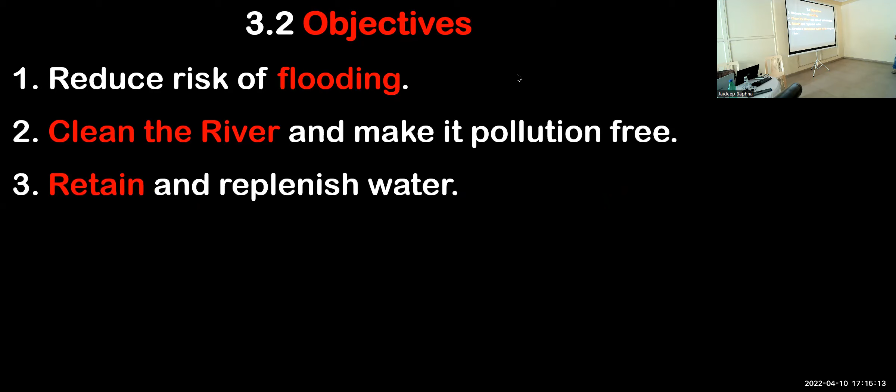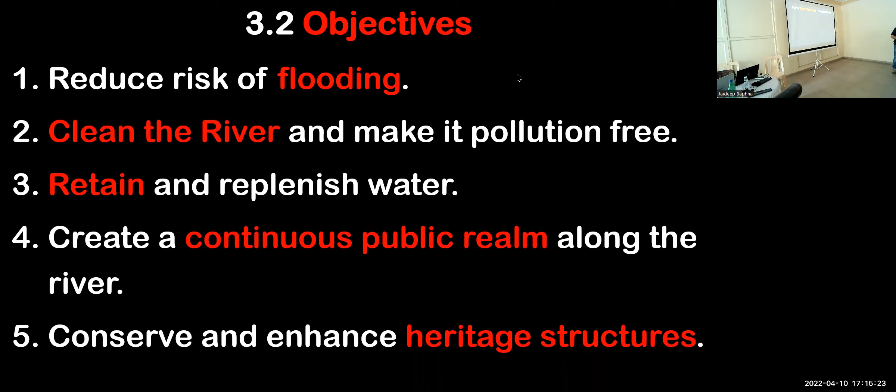Reduce risk of flooding, clean the river and make it pollution free, retain and replenish water, create continuous public realm along the river, conserve and enhance heritage structures. These are the basic aims mentioned in the DPR, in the same sequence, without any change.

Now let us see the present status of the rivers as far as pollution is concerned, because we all know the rivers are really stinking - a horrible thing. These are the most polluted rivers in the country right now.

Current water supply to the city from irrigation department, from various dams, is 1,350 MLD, that is million liters per day. Groundwater extraction, as per our estimates, is 310 ML daily. So total water consumption is 1,660 ML.

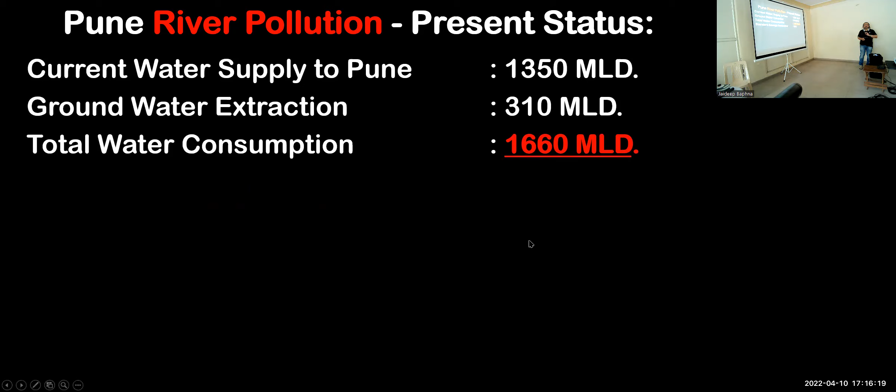As per CPCB norms, 80% of the consumption gets converted into sewage. So our daily sewage generation is 1,328 ML. Present sewage treatment capacity of all STPs of the corporation is 507 ML.

There is a new project financed by JICA. In that project, they are coming up with some 10-11 new STPs having total capacity of 396 ML. So in the next 5 years or so, our treatment capacity will be 507 plus 396, that is 903 ML.

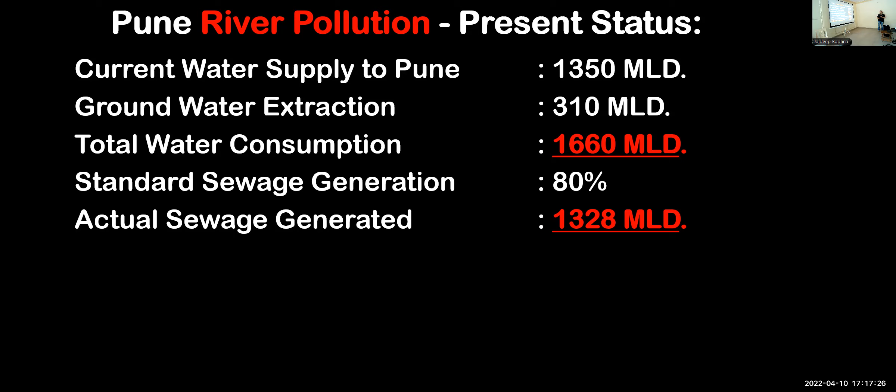Whereas as of now, we are generating 1,328 ML. So the minimum deficit, even after completion of JICA and this riverfront development project, is going to be 425 million liters of raw sewage entering into the rivers daily.

So whatever this project is, let us not go into the details. But whatever water will be there, it will not be water, it will be raw sewage. Can you imagine the impacts of this sewage on the downstream side people, particularly those living downstream on Ujani Dam?

There is only one species of fish surviving, that is chilapi. That's not a native fish, but it's the only one that can survive on very low dissolved oxygen levels. The fishermen are having extremely acute skin disorders. The water is not even usable for agricultural purposes.

The cattle are having multiple physical disorders, even human beings. That area is now known as the kidney stone belt. They are having multiple digestive system disorders, and the percentage of impotency is also increasing - not only in human beings, but in cattle also.

And we are responsible - we the people of Pune - because we are discharging raw sewage and industrial effluent without proper treatment into this system.

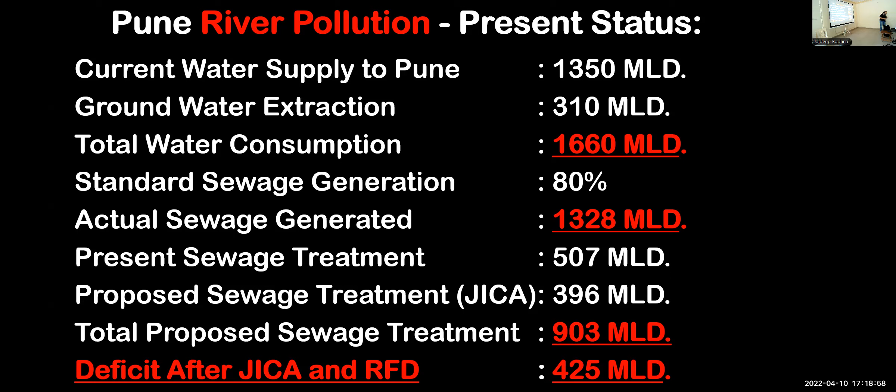So now, what are going to be the impacts of riverfront development? Let us go through them quickly. In spite of this project, as I have told you, the rivers are going to remain highly polluted. It is going to cause massive disruption in the traffic of the city, and of course it will lead to a rise in air pollution. Impacts of climate change are not considered anywhere in this project.

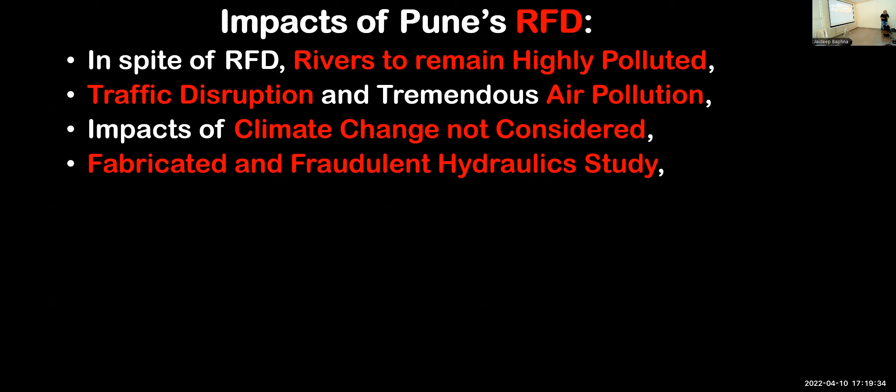Fabricated and completely fraudulent hydraulic study. Steep rise in flood levels within the city. Flawed environmental clearance has been accorded to this project by the central government. Depletion of groundwater table. Irreversible destruction of biodiversity - Gurudas will talk particularly about groundwater and biodiversity.

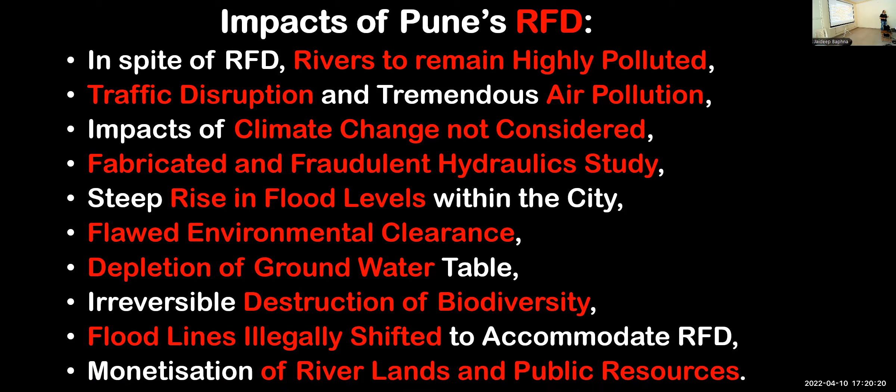Floodlines have been illegally shifted to accommodate this project. The river lands inside floodlines are going to be monetized, and public lands along the river are going to be monetized to support this project financially. So let us go to the first part, city traffic disruption.

Now it's a different issue whether a road should be there in the river or not - let us not go into that. But as of now, that road exists, and in the evening, thousands of people return by the same road.

Now, in this project, it is never communicated by PMC in their so-called public consultation meetings that this road and the bridge is going to be demolished.

Not only that, totally 4 bridges are going to be dismantled for this project. 2 bridges on Mula River and...

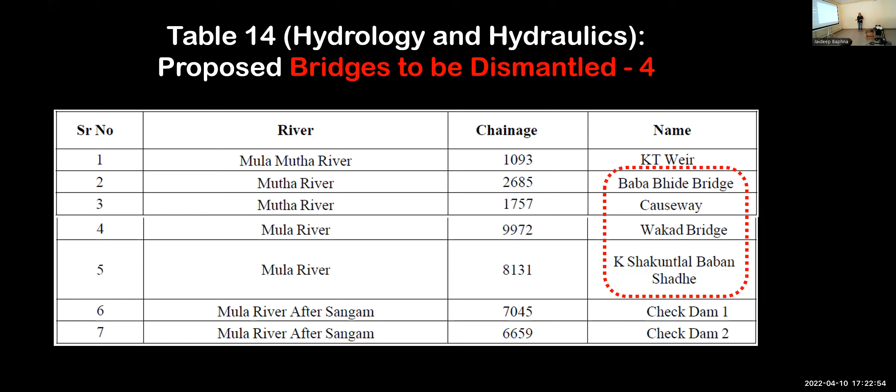7 bridges are to be elevated where they are. It is not mentioned anywhere in the DPR how they are going to raise the bridges, whether it is possible, which technology will be used, and how the traffic will be disturbed while elevating the bridges.

See, these are not small bridges. I mean, really very heavy traffic is there on all these bridges. Let us take only one example, Tilak Bridge.

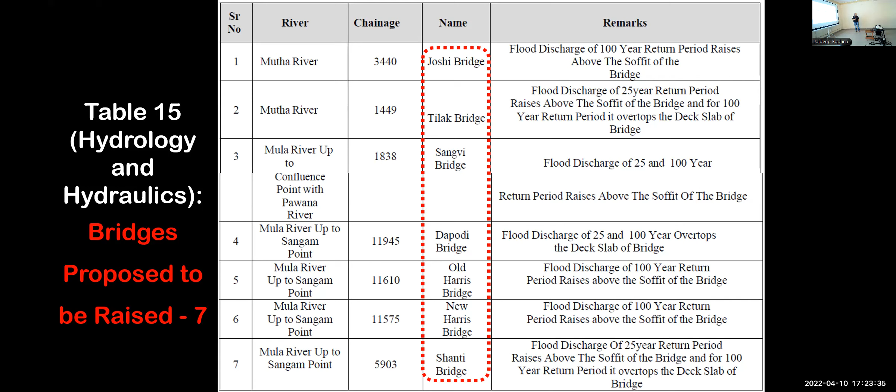Now see, this is from their DPR. All these tables are from their DPR. The bottom of the bridge, Tilak Bridge - this is Tilak Bridge - the bottom of that bridge is 545.98 meters. All these levels are given above mean sea level. So, 545.98, say 546 meters. That is the level of the bottom of the bridge. And...

They have given water surface elevation, level of the water of 100 years flood. That is given as 547.93, say 548 meters approximately. So the difference between these two, 546 and 548, is 2 meters. So if you don't want this bridge to cause any impediment to the natural flow of water, you have to raise it by minimum 2 meters - 548 minus 546. Otherwise, it will not serve any purpose.

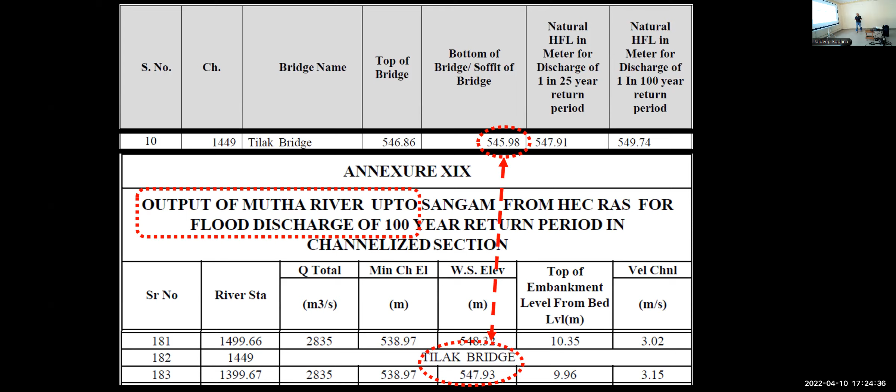Now, if you elevate this bridge by 2 meters, how will the vehicles approach or exit from this bridge? That bridge will be 2 meters above the road. Then are they going to provide steps for the vehicles? It's very simple, nothing very complicated, but they are planning to do it. Anyway, let us go ahead.

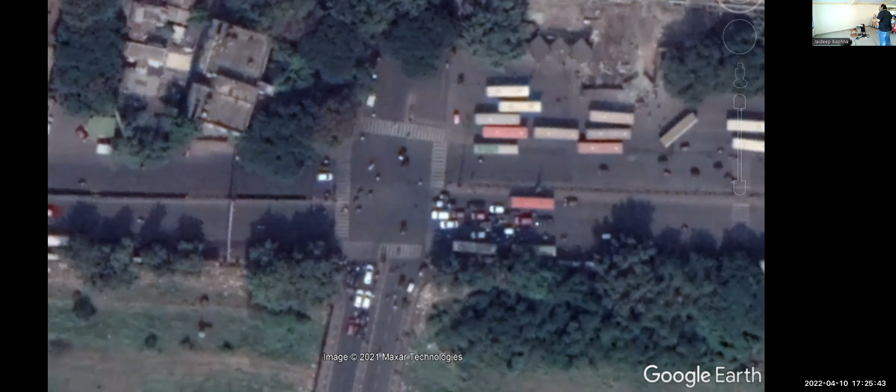In that report, they have divided the state into 6 divisions. Maharashtra is a pretty huge state, so they have divided the state in 6 divisions. Let us say only what they have stated about Pune. In Pune, they have stated that projected increase in monsoon rainfall is up to 37.5%. So annual rainfall is going to increase by 37.5%.

In fact, this is far more accelerated actually than what they have predicted. And not only this, but they also have stated in their report that on one side, annual rainfall will rise, but rainy days are going to be less. It means there will be much more frequent occurrences of cloudbursts, which we are experiencing - there is no need to prove it. This is not considered anywhere in this. They have not even mentioned the TERI report in this point.

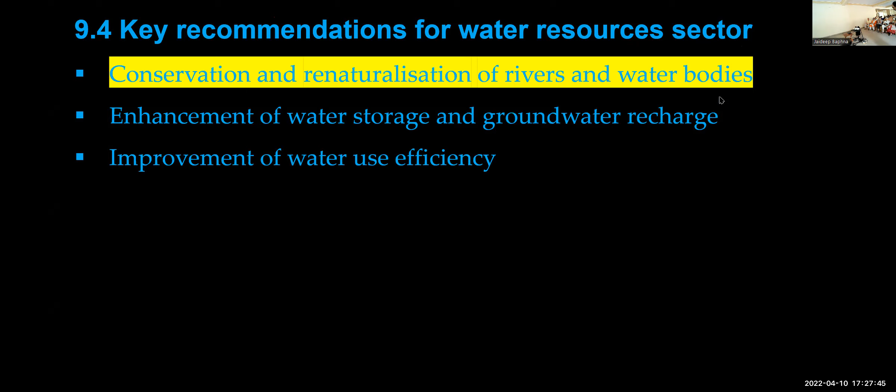In this report, they have also stated key recommendations for the water resources sector: conservation and renaturalization of rivers and water bodies. These are the directions given by TERI - retain and conserve the riparian zones, renaturalize existing wetlands, enhance native vegetation, and formulate stringent policies to prevent the dumping of debris and waste on floodplains and wetlands.

But this project is exactly opposite of this. They are dumping massive, unimaginable volumes of debris right on the river, constructing embankments and channelizing the river, reducing its width. Let us see the other side.

There are three important parts of this detailed project report. Actually the DPR is a few thousand pages, but these are the key sections: the main report, and then two hydraulic parts. In these 791 pages, the words 'climate change' are not even mentioned once.

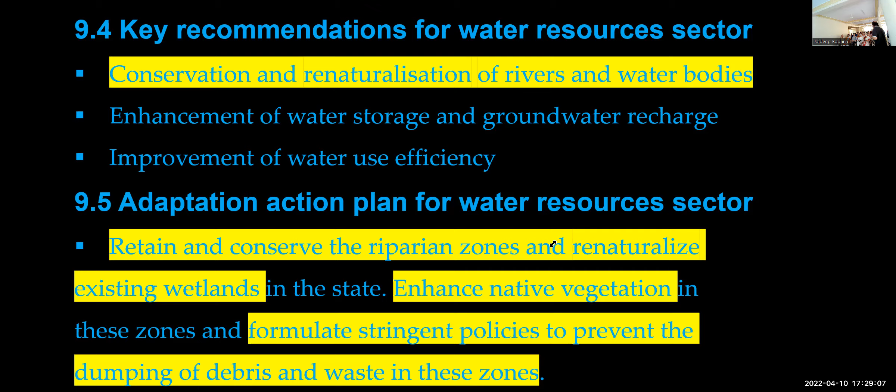Now let us go to the fabricated and fraudulent hydraulic study. This hydraulic study is going to decide the flood levels - it is going to decide who gets submerged, inundated, and who does not.

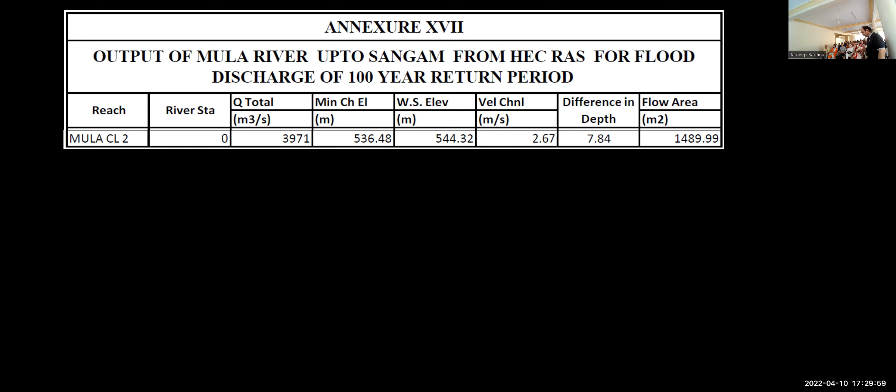In their annexure, here's the output of Mula River up to Sangam from HEC RAS for a flood discharge of 100 years. The Mula River water surface level near confluence, just before confluence, with the natural river bed as it is, they have said the water surface elevation is 544.32. After completion of this project, after channelization of the river, they also worked out the water surface level - that is correct, what will be the water surface levels for the same flood after completion of this project. Here they have mentioned 545.85.

The earlier level is 544.32, and after completion of this project, the water surface level rises by 1.53 meters - that is 5 feet - and we are paying 5,000 crores for this rise in flood levels. These are not my figures; these are the figures directly from their DPR. This is just the beginning.

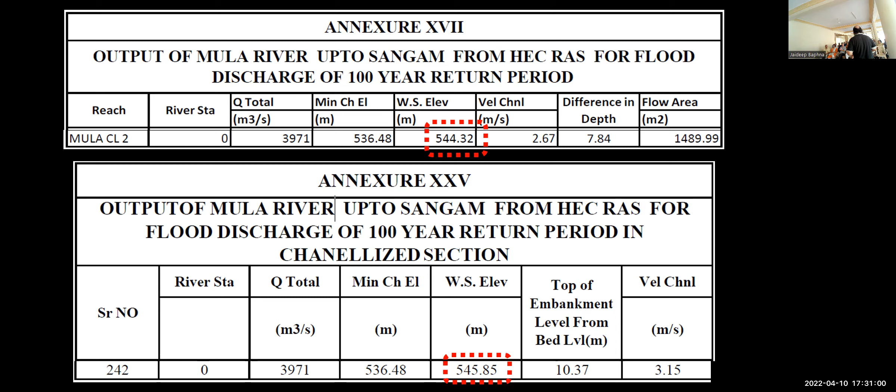When water is released from the dam, that quantity decides the level of flood. But not only that - the rainfall in the free catchment area, between the dam and the city, downstream of the dam and upstream of Pune city, whatever rainfall occurs, all that surface runoff also increases the water level in the river. That gets added to the discharge from the dam. So you have to add this flow from the free catchment area. This flow is not considered while computing the flood levels, and that is a huge error.

In Mutha River particularly, the main river flowing through the core city, the volume of water they have considered for the first reading is 2,835 cubic meters per second - a huge volume, almost 284 tankers of water per second. That is the discharge capacity of Khadakwasla. And for the last reading near confluence, they have taken the same figure.

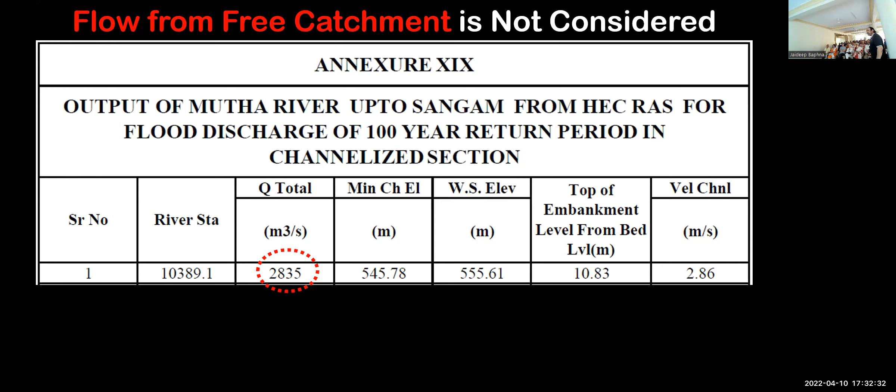Now, in between, there are so many streams. Even Ambil Odha brings in around 700 cubic meters per second capacity. There are innumerable other streams which also bring in water, and as per our calculations, which we are right now working on, the flow from the free catchment area is actually more than the discharge capacity of the dam. That is why every time their flood calculations go haywire - that is not considered at all.

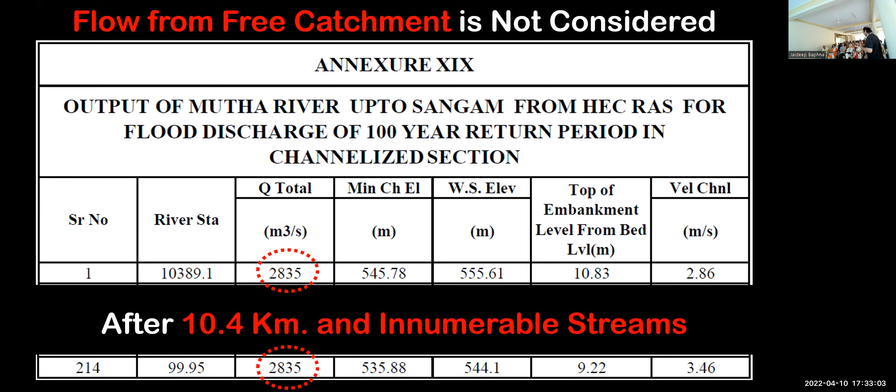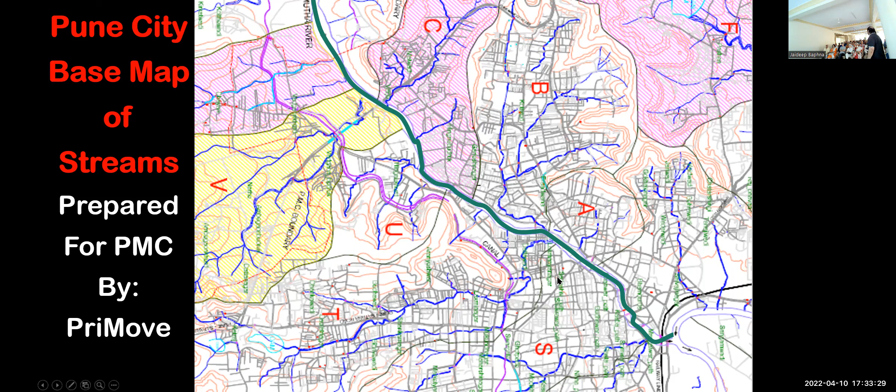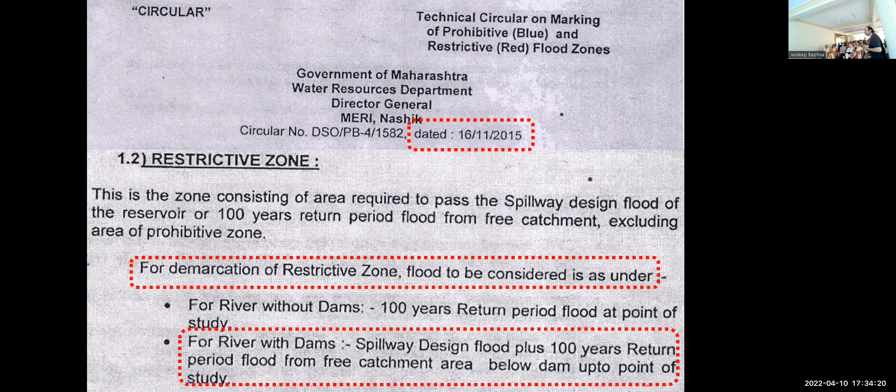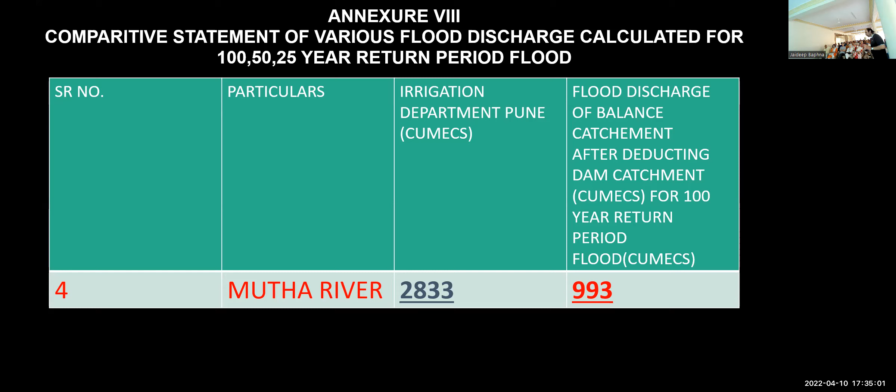And it has got all permissions - our corporation people, engineers, commissioners and architects. Nobody has even bothered to go into this game.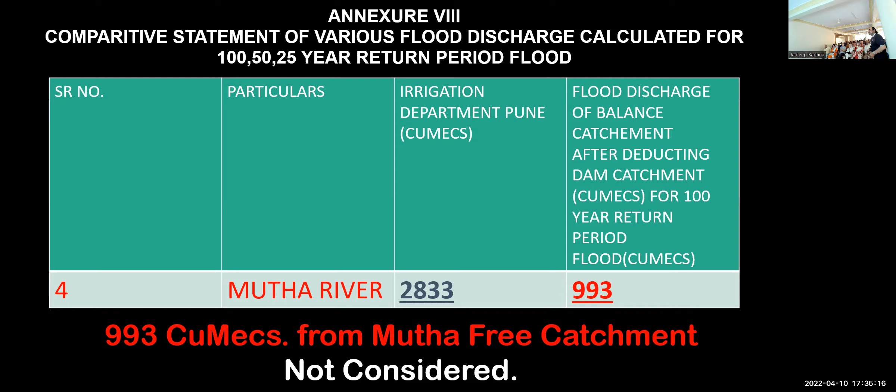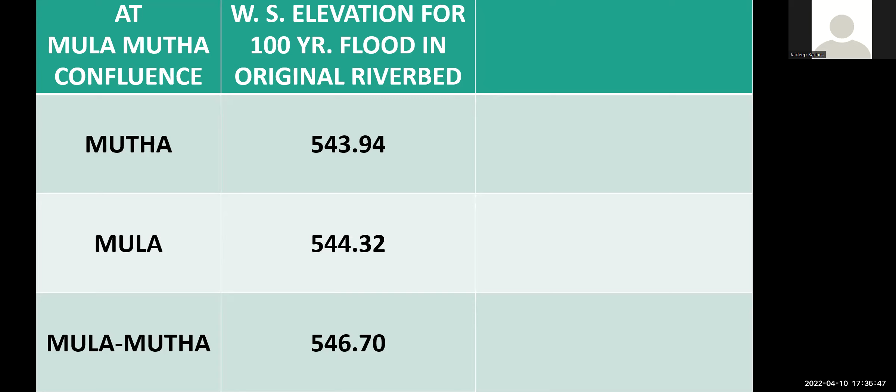Now let us see some flood levels. This is just near confluence. Near confluence, just before confluence, the surface level of Mutha will be 543.94 meters. That of Mula will be 544.32 meters. And after confluence, when these two rivers meet and Mula Mutha river starts, the water level is going to be 546.7. This is above mean sea level.

Do you observe any incongruency in this? Let us come to that.

Now these are the figures I have shown you as of now, without channelization. And after channelization, these will be the water surface levels as stated in the DPR by corporation. See, Mutha river flood level for the same flood, 100-year frequency, is going to rise by 16 centimeters, as per their own record.

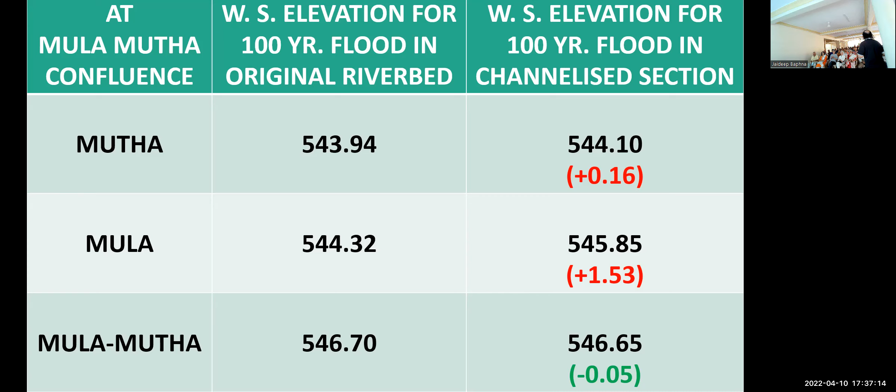Let us see whether it is correct or not - we'll see it later. Mula river will flow at 545.85 meters, meaning 1.53 meters, that is 5 feet above the existing flood level. Flood level will rise by 5 feet. And Mula Mutha river, after confluence, the flood level will go down by 5 centimeters, that is 2 inches. So for a rise of 16 centimeters in Mutha river, 5 feet in Mula river, and reduced flood level by 2 inches in Mula Mutha river, we are going to pay minimum 5,000.

You have to decide whether it is acceptable to us. Now let us directly go into this. So you tell me one thing. Confluence - there are 3 branches. From 2 directions, water is coming and it's moving downwards, downstream side, into Mula Mutha river.

Now Mula river is flowing in at 1.75 meters above Mutha River. And Mula Mutha River is at 546.65, meaning 2.55 meters, that is 8.5 feet above the level of Mutha. Now have you seen any time in your life at any confluence a water level difference by 8.5 feet at the same location, with the water climbing up naturally from 544.10 to 546.65 meters on the upstream side?

I mean, the Mutha River will flow from upstream, then the water will climb up by 8.5 feet, and then it will flow to Ujani Dam. How is it possible? I mean, this is stupid. We are not paying salaries of our corporation staff to approve this. And MOEF has given approval to this without thinking, without bothering for the safety of citizens. And this is squarely unacceptable.

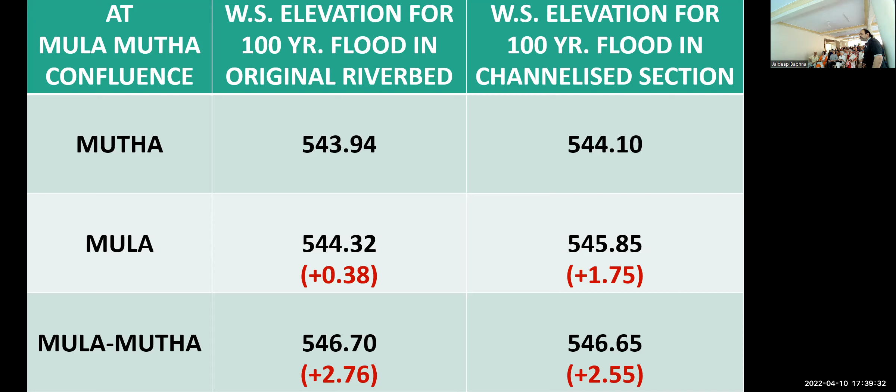This is the longitudinal section they have given in their portfolio of drawings. In their longitudinal section, Mutha River flows like this, and suddenly the water climbs up here by 8.5 feet, and then again it starts flowing down. This is the longitudinal section, this is the drawing they have given in their drawing portfolio, which is approved by everyone.

Actually, if this water is up to this level, then computation of flood levels of Mutha River should start in reverse fashion from this point. And actually the flood level of Mutha River will be like this. So now you tell me how many bridges and how many houses will be submerged. This is a difference of 8.5, only because of error in calculation.

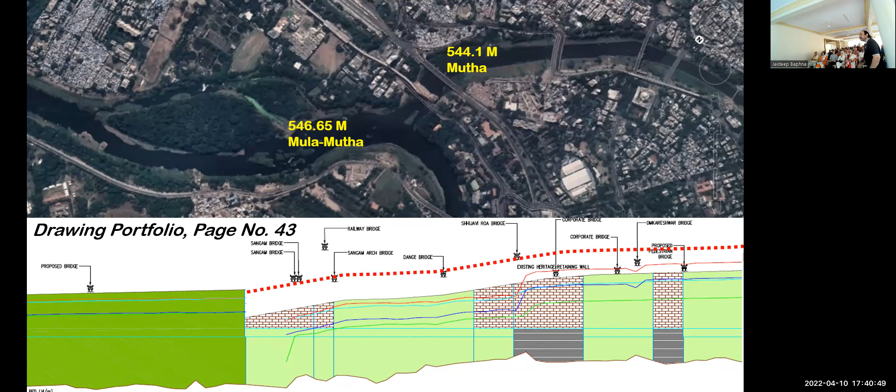Same thing about Mula River also. This is the point of Mula River confluence with Pawana. Mula River is flowing in this direction, meets Pawana, and then again the water climbs up and starts flowing down. This is a drawing directly from the portfolio. So the actual flood level will be like this. All these bridges will be submerged.

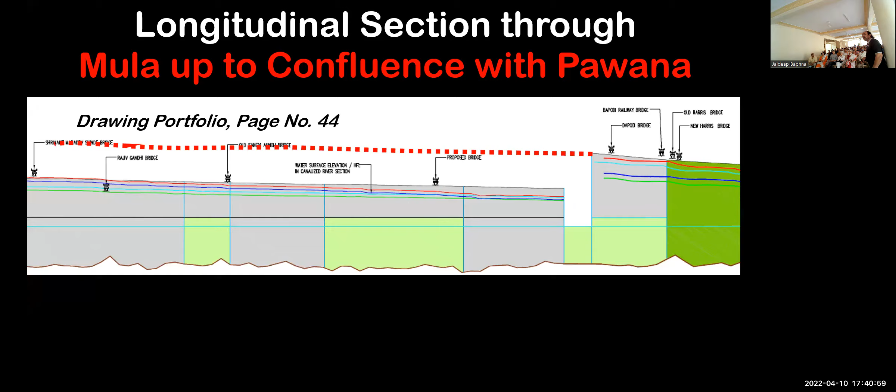This water surface elevation - we have seen that Mula Mutha surface elevation is given as 546.65. If Mutha River water is expected to flow towards the confluence, it needs to be a little above this level, say 10 centimeters above this, meaning 546.75 meters. But actually they have stated that the Mutha River water will be at 544.1 meters.

Therefore, there will be a rise of minimum 2.65 meters - 546.65 minus 544.1. This is a little intricate, but not very difficult. So there will be a rise by 2.65 meters in Mutha River.

In addition to that, we have to accommodate the free catchment flow of 993 cumecs. As per our calculations, that is going to add to this by 2.5 meters - 1000 cumecs is not small. So it's going to raise the level further by 2.5 meters, and this cumulative rise will be 5.15 meters, almost 17 feet more than what is stated in their detailed project.

What is communicated to the citizens of the city - it is definite, maybe here or there, doesn't matter, but it is going to cause a huge rise in flood levels. Forget about the climate change.

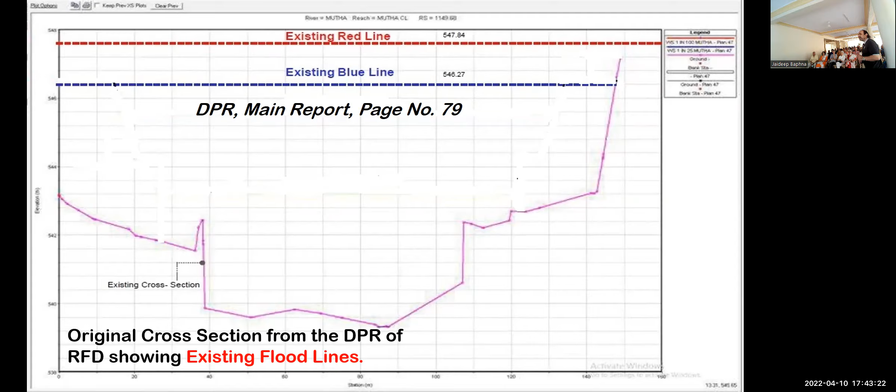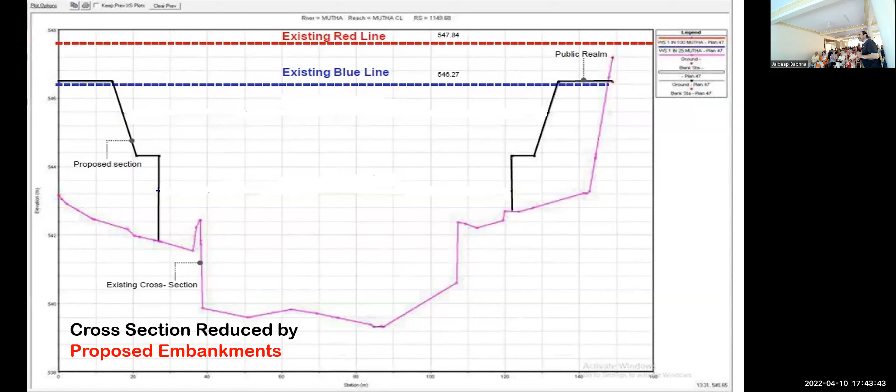Now they are going to construct embankments like this on both sides, concrete embankments, and these embankments will be filled with soil and concrete. So the basic width of the river, whatever it is, will be reduced to this. And they claim that the flood levels will recede - red line will come down by 2 meters, even below the original blue line, and blue line will go down by 3 meters. How can this happen? You are pinching the river, reducing the width of the river, and you claim the flood levels will go down.

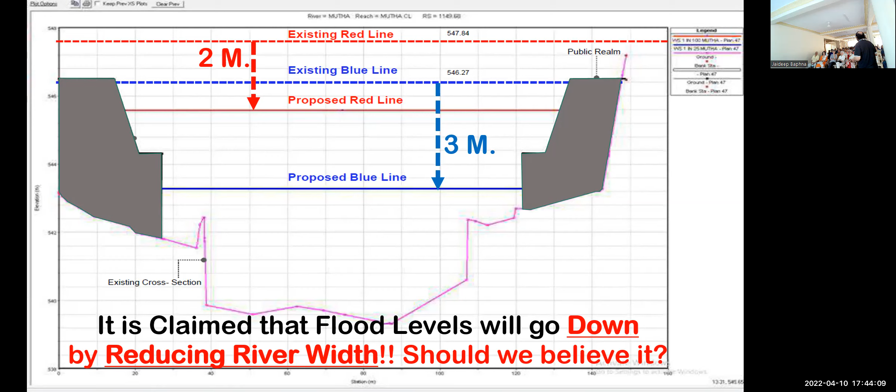I think we all have to step in now. It's enough.

Here also, see the original - this is the original cross section of the river, the outer dotted area. They are going to reclaim the floodplains by dumping debris. The cross-sectional area of the flow of water is going to be reduced drastically, maybe by 40%, 50%, whatever it is, and the width will be reduced to this.

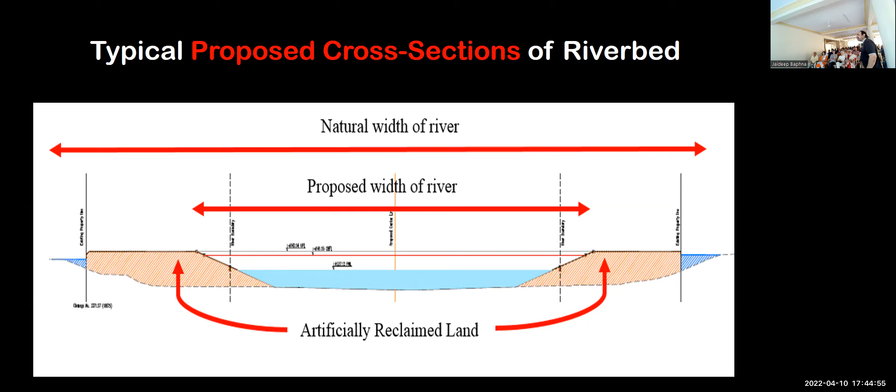Original width is this much, the proposed width is this. These artificial reclaimed lands will be used for commercial purposes, maybe for restaurants, school plazas, parking lots, and whatnot. That's our corporates.

Here there is another issue. There are 3 types of floods: coastal flood, fluvial flood, and pluvial flood. Coastal flood is out of question for us, but the flood caused by flowing water is called fluvial flood, and flood caused because of stagnation of water, which also occurs in Pune, is called pluvial flood.

At many places, these embankments are much above the surrounding ground level - 10 feet, 15 feet - top of the embankment is above the surrounding ground level, as per their own drawings. Now what will happen to the surface stormwater flow if there is an embankment and the water cannot enter the river? There will be huge stagnation on both banks, right in the city, and they have not addressed this. There could be another huge project of providing pumps, costing a few thousand crores rupees, to pump this water into the river.

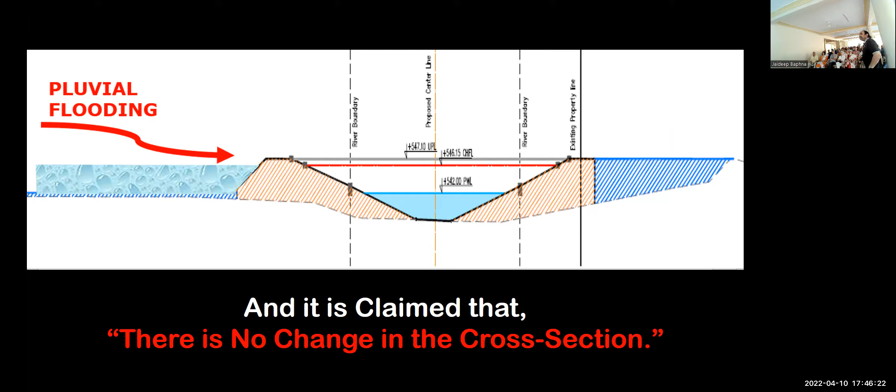And it is claimed by them that they are not changing the cross section of the river. See, the cross section of the river in the city is going to be like this. Can you imagine a cross section of the river like this? This looks like a canal if the water is clean, and like a gutter if it's not. The width shown is 90 meters.

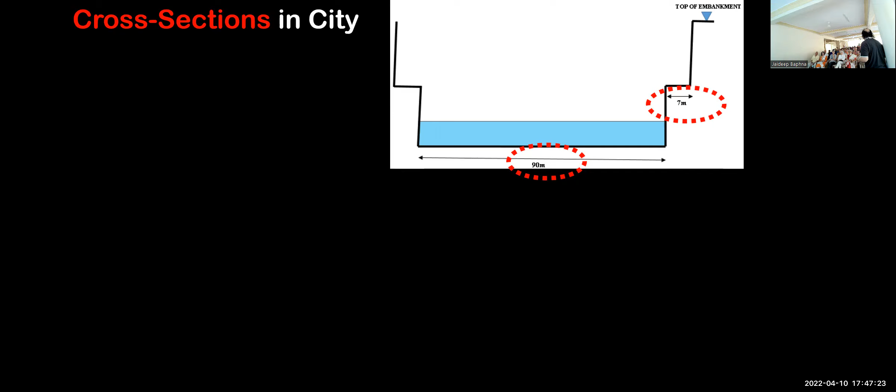Here it is 7 meters. And actually, the minimum water width of Mutha River in the city is behind PMC building - this is PMC building, this is Tilak Bridge - and the width of the river is 150 meters as per Google Earth. Now you are going to reduce the width from 150 to 90 meters. Why? To reclaim land, to commercialize that land. Forget about the flood levels - this reduction is more than around 35-40%.

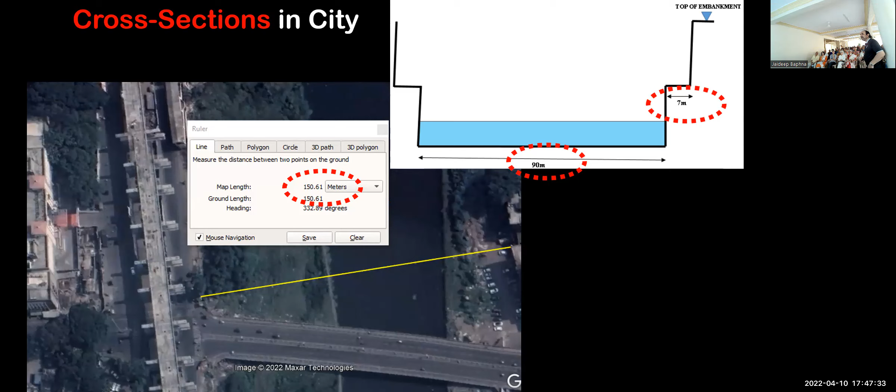Even you can see how shoddily this portfolio is prepared. Just one example: this is the region, blue color is shown for water. Now this is the cross section of the river. Can you imagine water like this?

This is given in the cross section. This is the way they have prepared the drawings, and our administration has approved it. Simple water remains at one level, I mean...

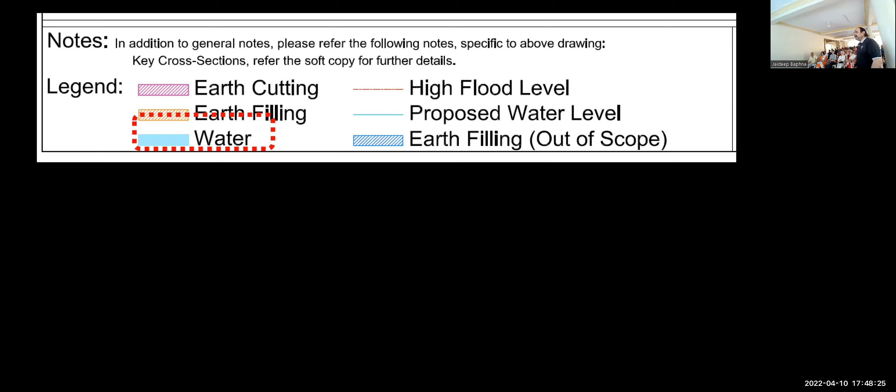In 2020, I have a copy of this letter.

What are the Indian standards? They always boast, they beat drums that we are following all standards for this project. Now, Indian standards give guidelines for planning and design of river embankments. They are planning to construct embankments throughout the length of the river. 44 kilometers is the length of this project, and with 2 banks that means 88 kilometers of embankments.

What do Indian standards say about alignment and spacing of embankments? Embankments should be aligned on the ridge of the natural banks of the river - on the ridge, not below that, where land is high. So they have clearly said that you cannot construct embankments on the riverbed. This is completely being flouted in this project. Flouted.

Now, what is the correspondence from the Water Resources Department and CWPRS? In 2018, the Water Resources Department wrote to the corporation that floodline maps were handed over to PMC in 2010 and 2011. As these discharges and floodlines are final, there is no question of approval to any other report prepared by any private organization, meaning consultants of this project, and checked by CWPRS.

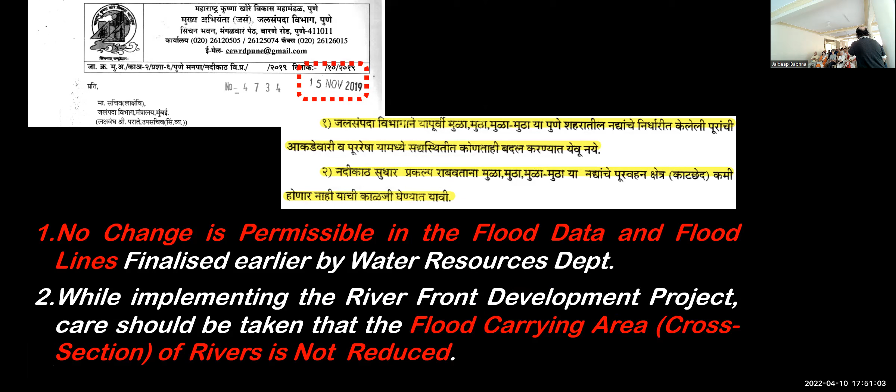In 2019, they said that no change is permissible in the flood data and flood lines finalized earlier by Water Resources. While implementing the RFD project, care should be taken that the flood carrying area, that is the cross section of the river, is not reduced - that saucer shaped cross section should not be reduced.

In 2021, they have again written - this is the third letter - the flood discharges and flood lines given to PMC in 2010 and 11 are final. We have observed variations between these and the reports prepared by the private organization and checked by CWPRS. So the Water Resources Department has observed some variation in the data provided to CWPRS. We don't know what was the data provided to CWPRS.

And further, on 20th October 2021, they have written a very interesting letter. The letter says there should be no impediment to the flow of the river. Carrying capacity of the river should not be reduced. There should be no change in the cross section of the river, no change at all. The Chief Engineer of Water Resources is authorized to take action against construction that causes impediment to the flow of water.

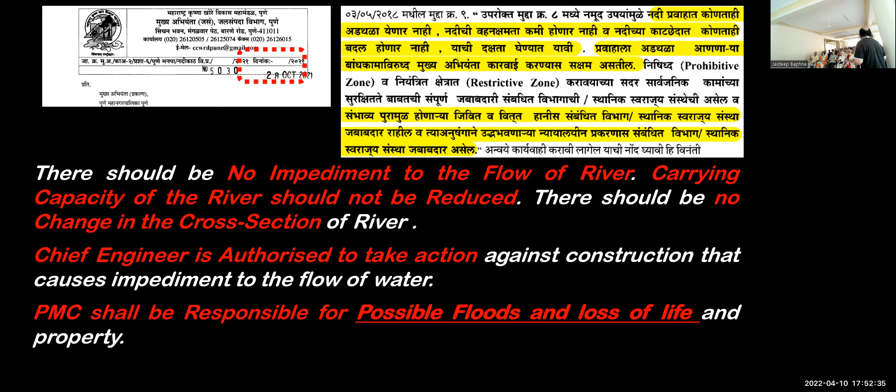PMC shall be responsible - PMC shall be responsible for possible floods and loss of life and property. What else will be? So they have indicated that there will be floods because of this project. PMC shall be responsible for any further litigation in this context. So they have washed their hands. They cannot actually - the Water Resources Department has put the entire responsibility on PMC.

Now, PMC claims that they have the approval from CWPRS, Central Water and Power Research Station. CWPRS is a very well-known organization, only in Pune. So PMC claims that CWPRS has approved the project.

But in that letter, what CWPRS stated is that in light of the above fact, CWPRS clears the report on hydrology of Mula-Mutha as regards the RFD project. They had cleared the report, and now remember what that irrigation department letter said, that there is some variation. What is that variation? We do not know. Maybe because of that variation, CWPRS has approved this report. They have not cleared the project - they have approved the report only.

And when we asked under RTI to CWPRS - with what study have you cleared this report? CWPRS responded that CWPRS did not conduct any study for the RFD of PMC. This is from 5th April 2021. So CWPRS did not conduct any study of riverfront development of PMC. CWPRS is not the clearing authority in the matter.

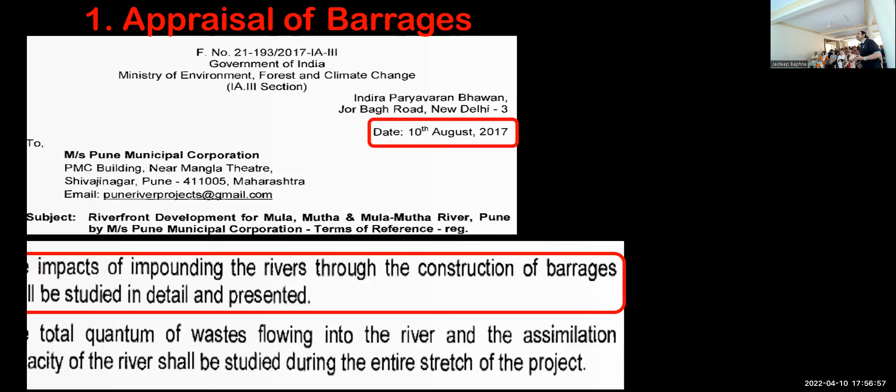So they have clearly said that PMC has to assess the impacts of construction of these barrages and submit it in detail to CI. In spite of that, PMC did not conduct any study for these barrages. As per their original estimated cost, the cost of these barrages was something like 250 crores. Now it will definitely be more than 500-600 crores. It's a very important component of this entire project, but they did not conduct any study of these barrages for impounding water.

In spite of that, even though it is mentioned in the TOR that you have to conduct that study, and they have not conducted the study, environmental clearance should have been rejected. Absolutely. But the EC was given to this project, and while giving the EC, it's a very slippery EC.

They have mentioned that the project proponent informed that there are 4 barrages to be constructed at following places A, B, C, D. As the committee has no expert working in this field, the committee has not gone into this aspect, and proper appraisal from proper authority in this regard is possible. What is this? You are a committee appointed only to study such projects, and you don't have expertise to evaluate the impact of these small barrages.

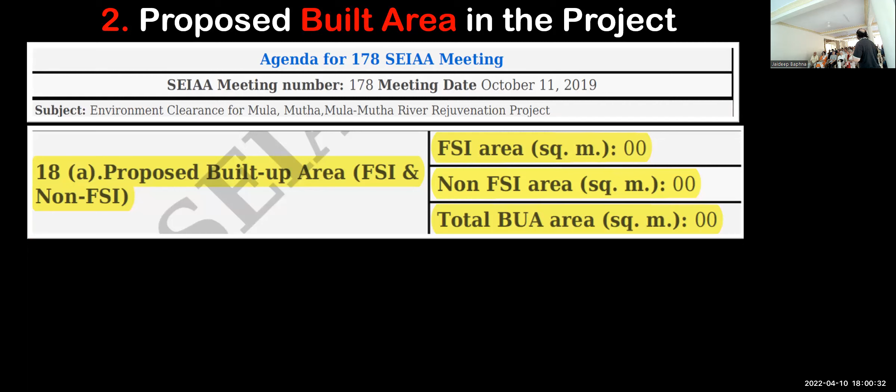When we studied the detailed estimate of the project, you can't believe it: 22.5 lakh square meters, not square feet, square meters. One square meter is 10.764 square feet. So 22.5 lakh square meters is the built area in this project. That's conservative, and it amounts to 556 acres. Such a huge built area is there in the project.

And for environmental clearance, it is mentioned as 0 square meters. That table is not prepared by us, it's directly copy-pasted from the minutes of SEIAA meetings.

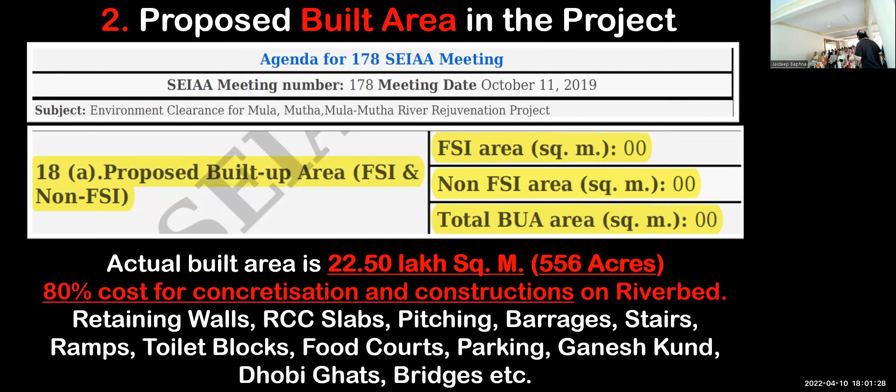The retaining walls, RCC slabs, no need to mention about barrages, pitching, stairs, ramps, toilet blocks, food courts, and whatnot. This is only a small part of their estimate. See this lower level pitching and toe wall, 2,83,800 square meters. Mid level pitching, 1,05,000 square meters.

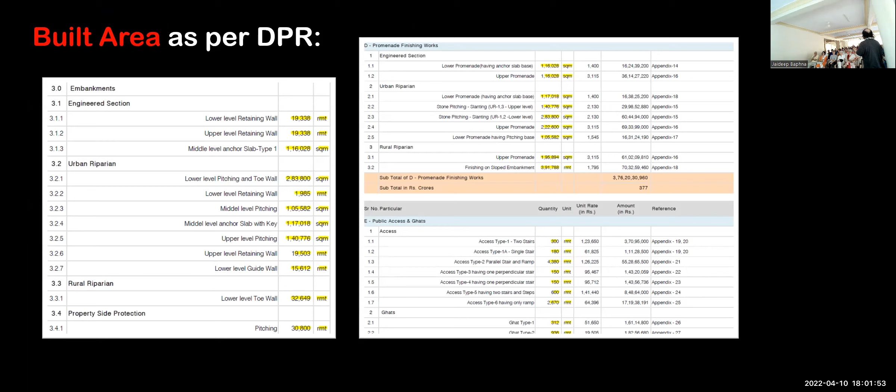So huge quantities, huge. Now, existing structures. It was asked what are the existing structures within the boundary of this project. There are no existing structures, they said. It's a 44-kilometer long river flowing through the heart of the city. There are so many temples, samadhis, ghats, dargahs, some walls. There are so many structures existing in the riverfront along both the banks. But they have stated that there are no existing structures.

In their DPR, somewhere they have mentioned that minimum 20 plus bridges are there. Pune cannot survive without bridges. There are so many bridges. When you stand on one bridge, you can see over another bridge on both sides. So many bridges are there, check dams, piers, temples, even slum pockets are there. But for environmental clearance, there is no existing structure. This is the list of heritage structures from the corporation website only, which are allowed.

Now, fourth point is demolition. It was asked to give details of demolition along with plans regarding disposal of debris, because when you demolish anything, debris are generated. So how are you going to manage that? They said that there will be no demolition. Actually, as I told you right in the beginning, 4 bridges are going to be demolished. That 3 kilometers long road is going to be demolished. There are so many walls, even small buildings also are going to be demolished. They have provided some 20-25 crore rupees as a lump sum amount just for demolition.

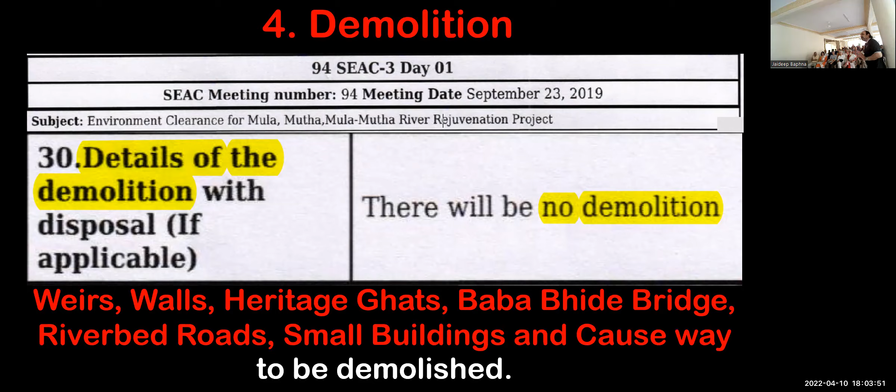Fifth point is regarding deepening of the rivers. During discussion, it's mentioned in the minutes that the project proponent informed that no activity pertaining to deepening of the river will be undertaken as a part of this. So PMC has told them that we are not going to deepen the river anywhere. Deepening of the river causes huge problems, that's another issue we can discuss later. But PMC told them that we are not going to deepen the river.

But again, we go back to the drawing portfolio. This is one section, see, in purple color, earth cutting, and here throughout the width of the river they have provided minimum 2 meters of earth cutting. Why? This is deepening. Now if you deepen the river, you cannot deepen it from beginning to the end, there are so many bridges. You cannot deepen the river below the bridge, you cannot expose the foundation of the bridges. The bridges will collapse. So if at all you deepen, that deepening will be between 2 bridges.

It will cause only ponding, because below the bridge you have to retain the original level of the river. So then why have you provided this deepening? Not only this, see this is minimum some 20-25 feet deepening here. So on one hand you commit that you are not going to deepen the river, but actually you plan to deepen the river.

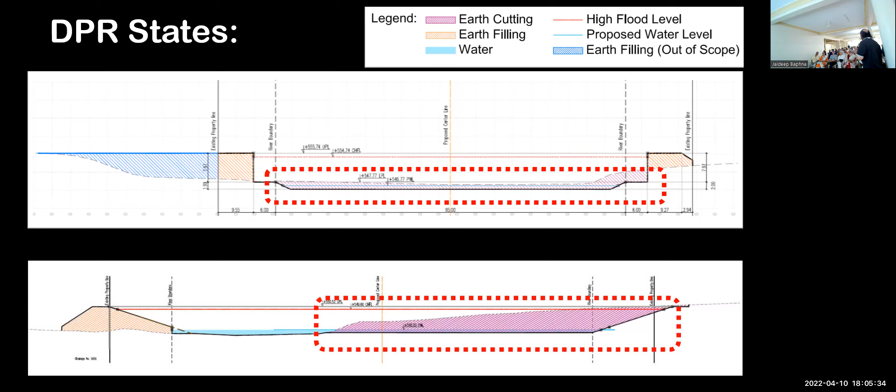So these are the 5 huge flaws in the environmental clearance. I don't know on what grounds the EC was accorded to this. This is the way they are going to construct concrete embankments in the city like this. So this is the original bank, original profile of the riverbed, and these are the concrete embankments. There will be manicured artificial gardens over here.

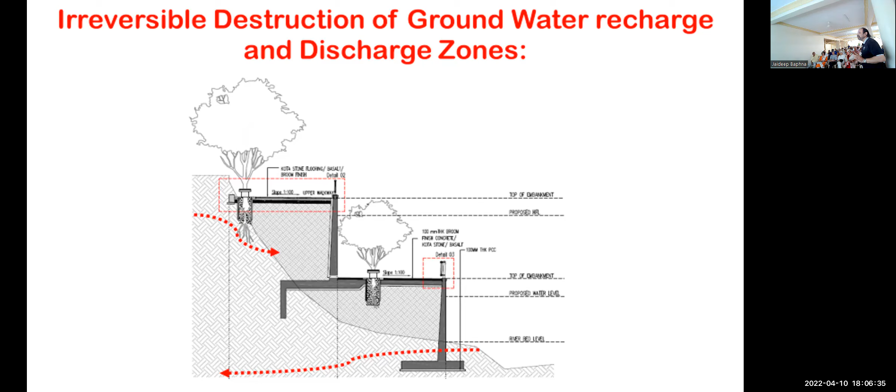There are so many aquifers. Gurudas will tell you in detail, but all these aquifers, some discharge water into the river, some get recharged because of the river. They take water to the wells and bore wells. All these recharge and discharge zones will be cut off from the main natural flow of the river because of this impact. This is definitely going to affect the groundwater, perpetually. This will be irreversible damage. Then, as I told you, floodlines have been shifted to accommodate this problem.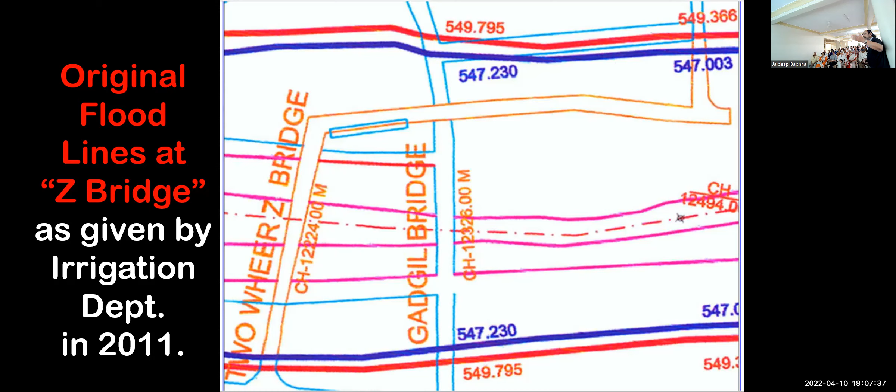Given in 2011. After that, state government irrigation department came up with a circular that they have clearly stated that only chief engineer of irrigation department can approve these floodline maps. Only chief engineer. That authority cannot be delegated to anyone below that level of chief engineer. This was given in 2015.

Later on, another circular came. The marking on maps and on ground shall be cross-checked by ground truth verification. It should be cross-checked, and after verification, regional chief engineer shall sanction the maps. So it was reiterated by state government, by water resources department, that only chief engineer can prepare and approve the floodline maps. In spite of these directions, in 2016, after this...

One executive engineer prepared the floodline map and handed it over to PMC. These are totally fraudulent floodlines. It was a big case, and some PMC officials and this particular executive engineer of irrigation department were hand in glove with each other. Very efficiently, PMC officers forwarded those fraudulent flood maps to state government to incorporate into the development plan. And whatever floodlines we see in today's development plan are completely fraudulent, illegal. They don't have approval from chief engineer as directed by state government.

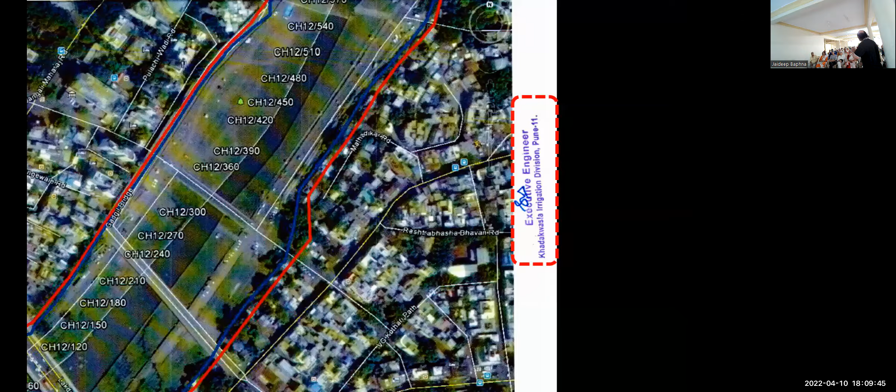We worked it out on AutoCAD and superimposed both sets of floodlines, old and new, and found that the red line is shifted by 81 meters, and the blue line is shifted by 65 meters. This shifting is different at different locations. Here it is 37 and 36 meters. These are huge distances.

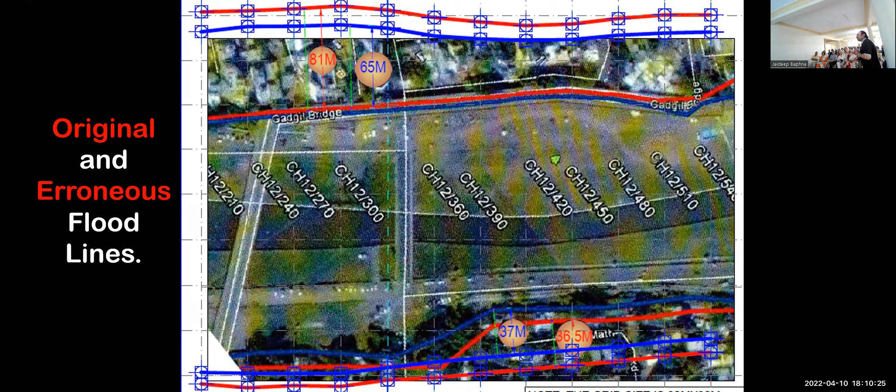100 feet is 30 meters. Can you imagine 81 meters? Almost 250 feet. And PMC officials have started giving permissions in these areas, not only here, but everywhere along the river banks, on floodplains. They have started giving building permissions.

I'll come to that. We asked the irrigation department, we asked the chief engineer under RTI, have you given approval to these floodline maps? We got a very clear answer that such an approval letter is not available. This is from the office of the irrigation department. They have not approved the floodlines which were forwarded to PMC by their own official.

Now we have filed a PIL in Bombay High Court against this illegal shifting of floodlines in the DP map. But when we brought it to the notice of irrigation department that PMC is following this wrong set of floodlines, they immediately wrote a letter to PMC saying you have to cancel these recent floodlines and follow the 2011 floodline maps which we had given earlier. But PMC is not following it.

Even after this letter issued in 2020, PMC has given many building permissions on floodplains. One of the buildings is 16 stories with 4 basements on the floodplains. The people who have booked flats in such buildings are middle class people. They are not aware of these floodlines, climate change, dam discharge, and catchment area flow. They just see that PMC gives a building permission, that's all, and they book the flats. Even banks give them loans.

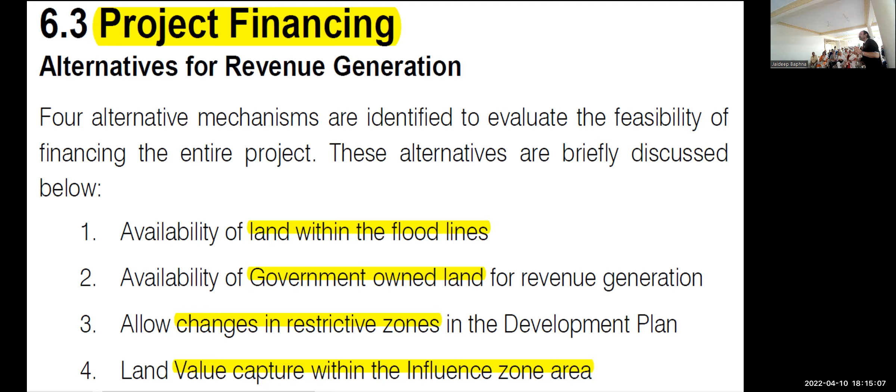In one of our cases filed in 2013 at the National Green Tribunal, the PMC Commissioner actually filed an affidavit stating that respondent number one, that is PMC, undertakes not to permit in future any building construction activities within the blue line. This was a clear-cut statement by the PMC Commissioner that they will not construct anything in the blue line. But this project is nothing but construction of embankments completely inside the blue line.

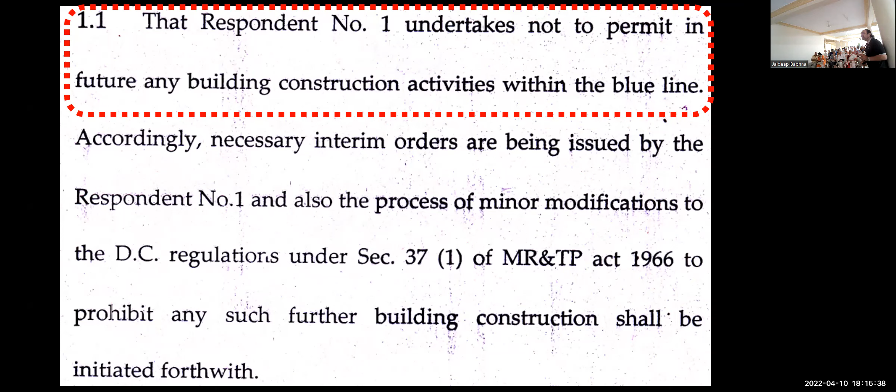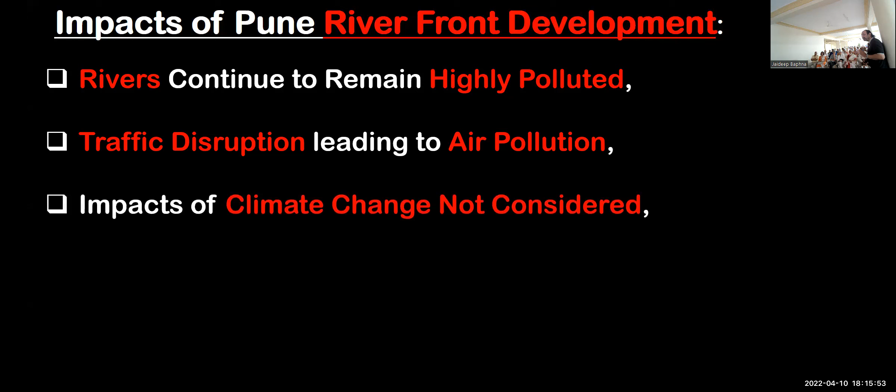Many people say that we don't want the rivers to improve. We all definitely want our rivers in much better condition - these are some of the worst, most polluted stretches in the country. We want our rivers to be rejuvenated, but not by concretization and construction like this. We want the rivers to be rejuvenated by ecology.

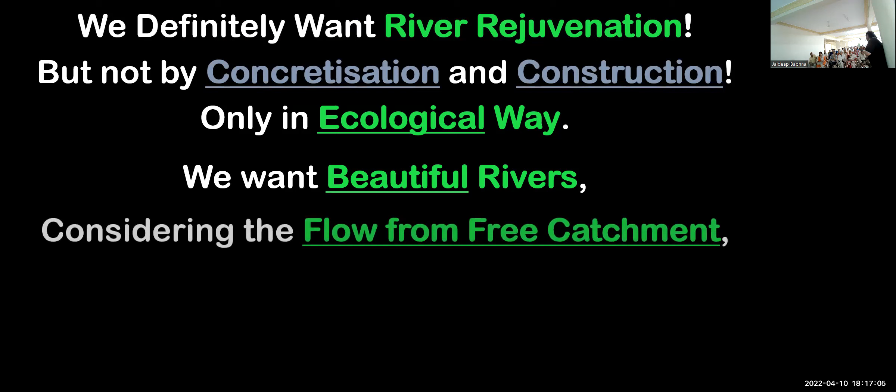In this entire presentation, we have not raised any objection on those 5,000 crores. We have raised objections only on what we are getting in return for 5,000 crores. We want beautiful rivers considering flow from the free catchment without altering the cross section. We want clean rivers, but before that, we want safety from floods.

These are some of the citizens, not only from Pune but from far away also, chain asking to protect Pune rivers against this project. I'll just show you some important data, just 2 minutes.

This project's consultant had conducted a survey with the citizens of Pune, and this is the feedback they received: 91% said water quality should be improved, 89% said there should be natural flow of water, 86% said there should be ecological restoration, and 76% said there should be flood protection. This project doesn't satisfy any of these demands of the citizens who are going to pay for it. Not a single demand is met.

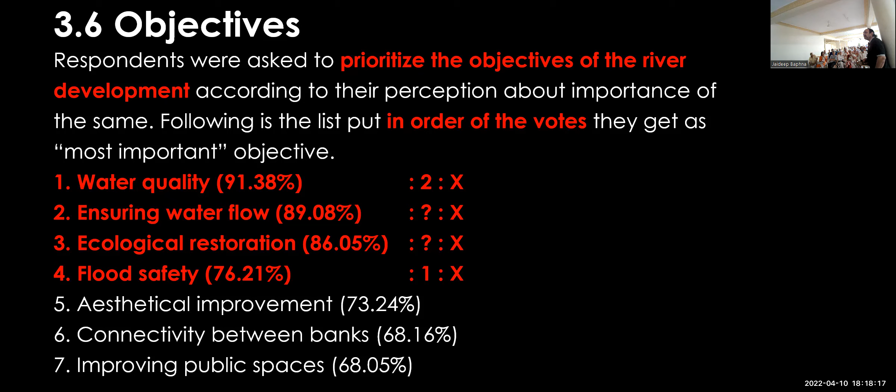It is stated that this project is completely based on the Sabarmati River model. The consultant is Bimal Patel, HCP Private Limited, who is the consultant for Central Vista and also for the Banaras Ghat. The corporation says such a big consultant is working on our river project, he is obliging us - he's a Padma Shri awardee, so we should be proud.

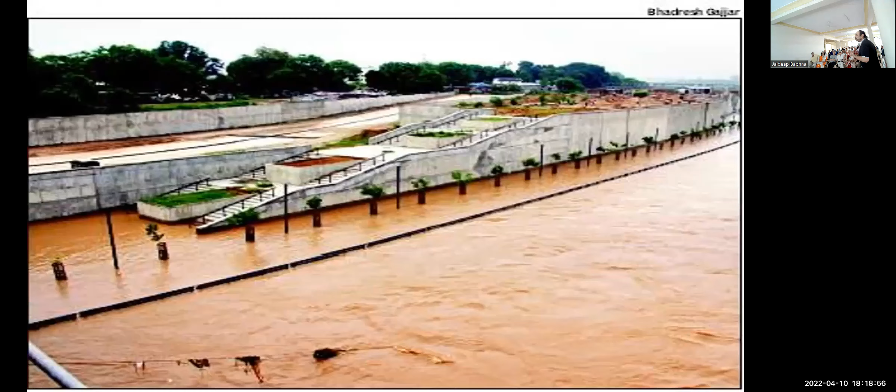But actually, what is the situation at Sabarmati? I'll show you some photographs. Sabarmati cannot be equated with our rivers. Sabarmati has an immediate dam 130 kilometers from the upstream. We have our first dam at just 7 kilometers. The rainfall in that area is quite arid compared to here - there's a vast difference in rainfall. It cannot be equated with Pune's rivers.

So this is the condition of the riverfront development after Sabarmati got built, and we are going to pay 5,000 crore rupees for something similar. The width of Sabarmati is a minimum of 250-300 meters, but here the river width is going to be reduced to 90 meters.

Now this is hyacinth - Sabarmati's water doesn't flow. I don't know why they call it a river. If the water doesn't flow, it's just a bathtub - not even worth bathing in, just stagnant water. Sabarmati doesn't have its own water; the water is given by the Narmada canal. So Sabarmati doesn't flow, it doesn't have its own water, yet it is still called a river. This is the hyacinth in Sabarmati.

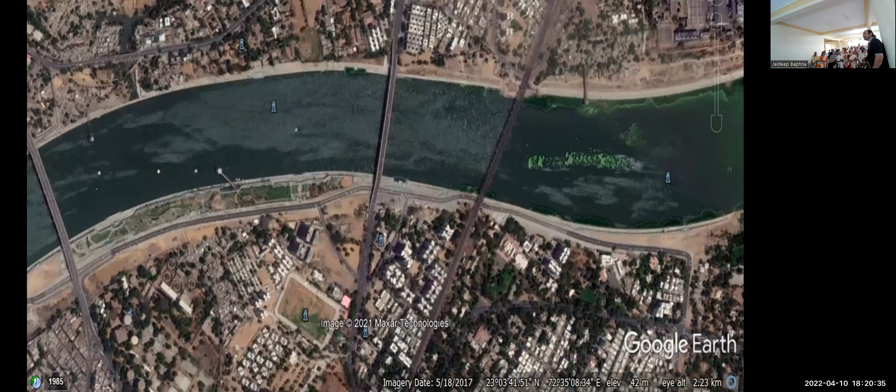These are Google images, this one just near Sabarmati Ashram. Sabarmati Ashram is here. This image is from 18th May 2017 - so this is the state of the Sabarmati river, and maybe if we don't resist, it will be worse than this.

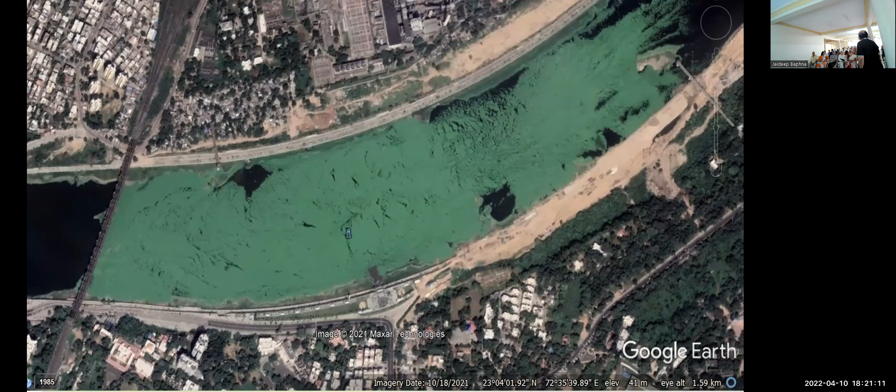That is Vadodara, the Vishwamitri River. A similar project was proposed there, but those people stopped it.

Thereafter we have the question and answers, and issues concerning us specifically. As mentioned, the work orders have been issued, and one of the work orders, the first work order, is issued for our area, Sangamwadi, I think, to Bund Garden. So if you're living near the river, you're going to swim in it very soon.

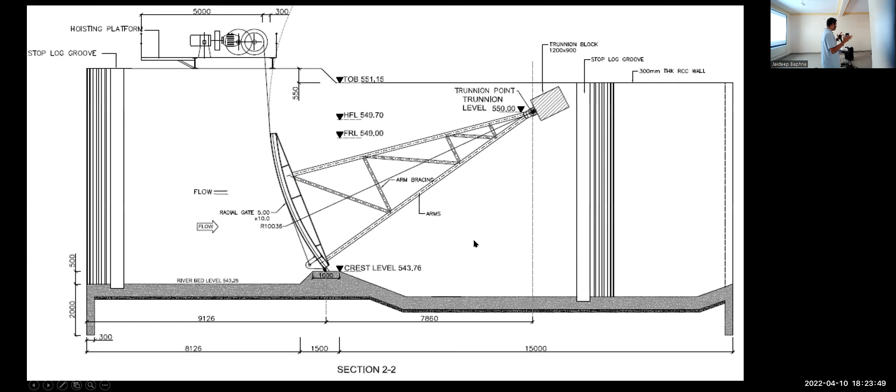I just want to add one more point to your observation. Most importantly, what probably Sarang did not mention is that this is continuously being compared with the Sabarmati. The Sabarmati is a completely different river with a completely different personality. It originates in the Aravallis, while our rivers originate in the Sahyadris. The Sahyadris receive 6,000 mm of rainfall in a short span of about 25 to 30 days, whereas the Aravallis do not have an average rainfall of more than 900 mm.

The river from the Aravallis flows into the Gulf of Khambat - it's a west-flowing river. The topography of the Indian plate is completely different when it flows towards the east, compared to when it flows into the Bay of Bengal. So now we are talking about 6,000 millimeters of rainfall falling on the Sahyadris - assume the Sahyadris are a mountain, meaning they are a water divide.

The second most important thing I want to tell you is this: the entire project talks about river rejuvenation, right? But in the vision, in the objectives, in the scope, nowhere is the word 'riverine ecosystem' mentioned at all. Nowhere in the scope is it mentioned about biodiversity, aquatic life, vegetation, floating vegetation, crustaceans, mollusks - none of that. Are they important to you and me? Most certainly they are important to you and me. What is the reason? A river is not a flow of water from point A to point B.

A river is a flow of energy. A river is an ecosystem. What do I mean by an ecosystem? An ecosystem has two components - physical entities and biological entities. In the entire ecosystem, there is continuous exchange of matter and energy between the physical elements and the biological elements. This happens via the natural route of the interface between water and land, which is the riparian zone, which is the bank.